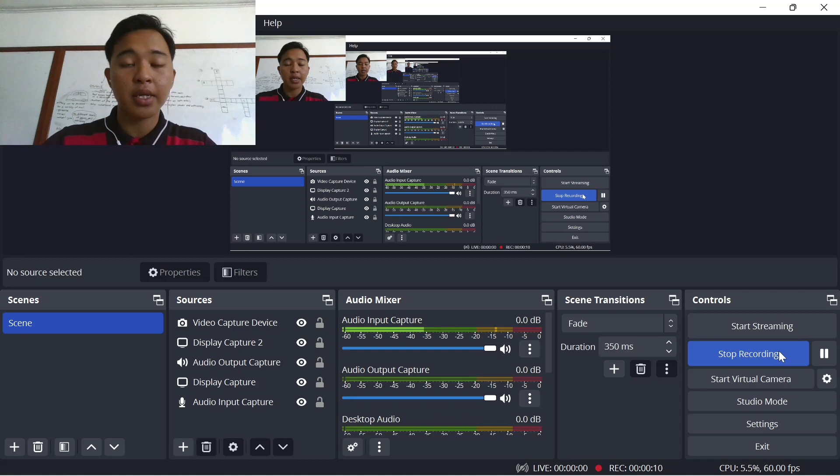In this video, I want to explain how I do my SolidWorks project and the process. Okay, before I start and proceed to the project itself, I will turn off my camera first to avoid any interruption while I'm explaining.

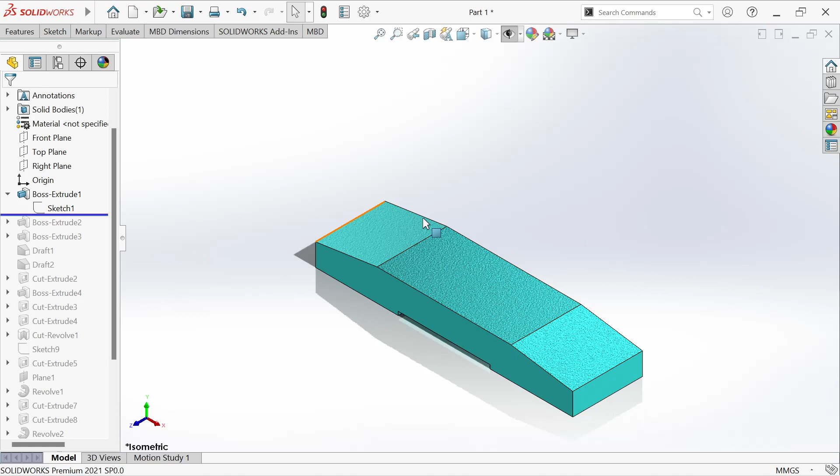Okay, as for the first part of my project, I do the pillow block first, or the housing of the bearing. Yeah, as you can see. Okay, as you can see, in the first part, I start off by doing the base of the pillow block.

If you can see from the sketching, the first thing I do is draw a center rectangle, and I put the length of it as 140, and I leave off the width and the height first. After that, I draw a line connecting from the right side and left side. I draw two lines connecting the right side to the top side of the rectangle. Same goes for the right side to the top of the rectangle.

After that, I put the dimension at the right side, which is 12 mm, both right and left side. And then I put the line length as 33.50 mm. And then I use the equal function for both lines here and here. And to make the foot of the base structure, I use a 2 mm gap and 44, 45 for each foot.

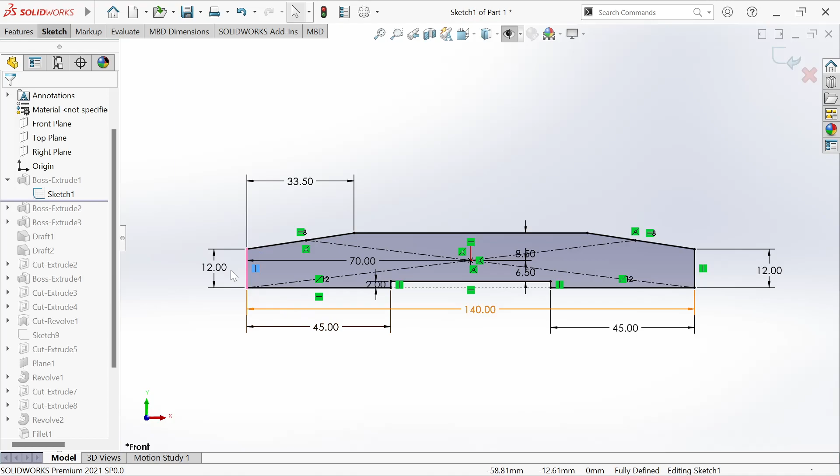To make the sketch fully defined, I make sure all of this is vertical and also coincident points. After that, I boss extrude the sketching. Here, as you can see, I boss extrude it from mid plane by 38 mm.

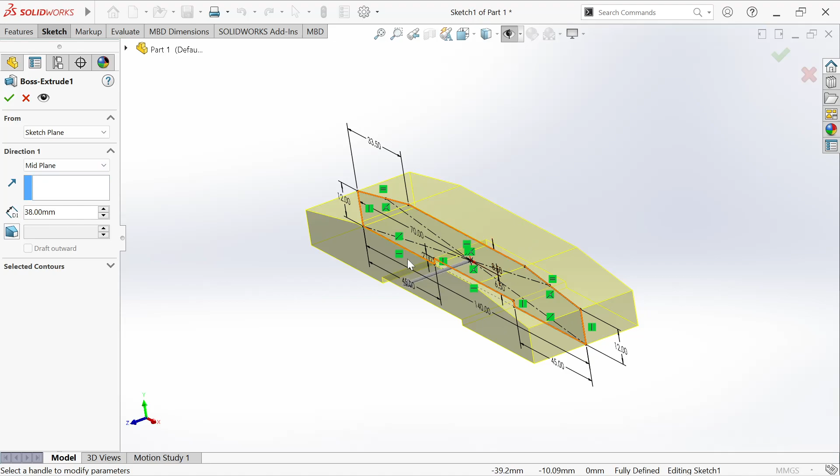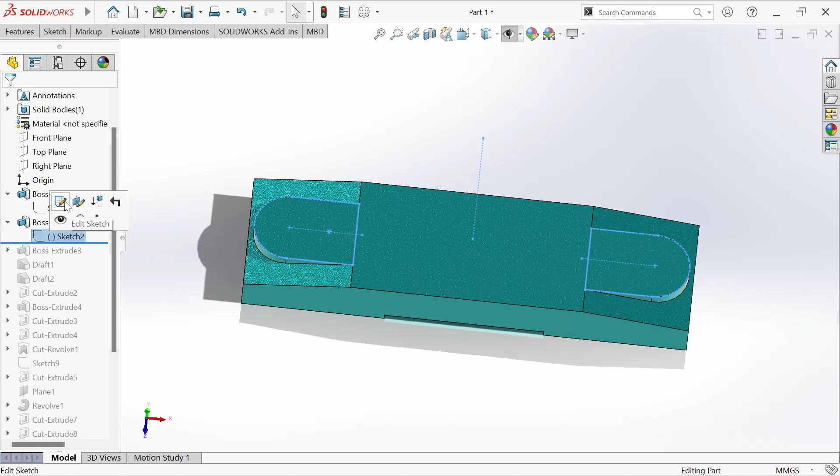So for the next part, I do the gap here where we will put the screw or the connector place. Here what I do is use a straight slot from here to here. Then I put the dimension 21 mm. The radius for the curve here is 11 mm. And for the width, I use 22 mm.

And as for the right part of this left slot, I use power trim and I trim the right side of the slot, the curve of the right side. And I make this coincident. The point of the slot is coincident. And then I draw a line here to make sure it is one available slot. After that, I draw a line here to make sure I can use this line to mirror the entity.

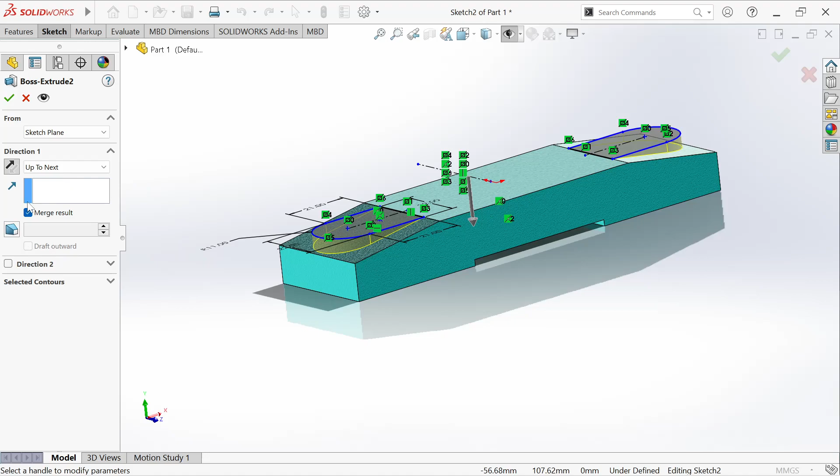After I mirror, I extrude the sketching using up to next. Yeah. With no specific dimension, I only use up to next and it will come up like this, the same as the upper side of the base.

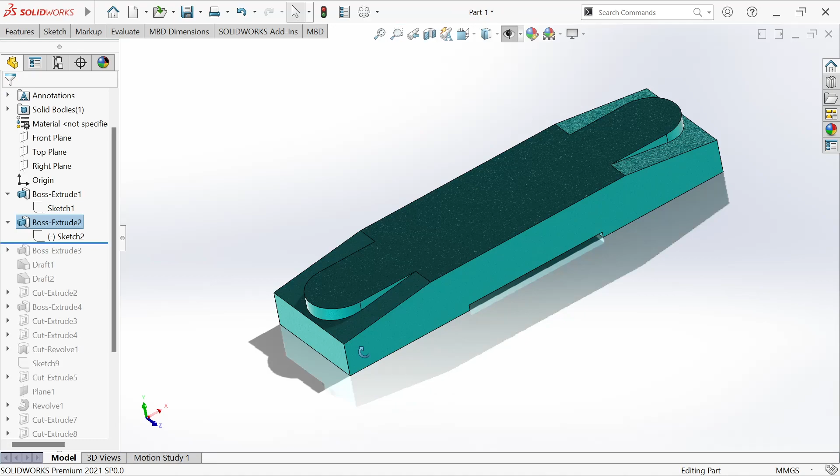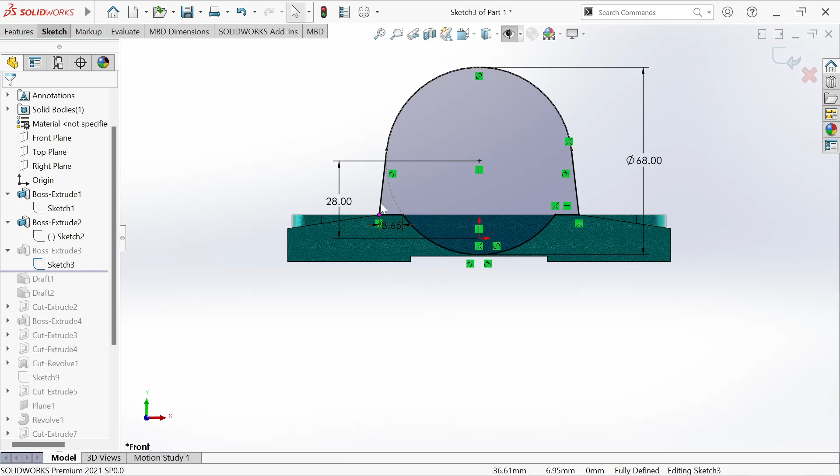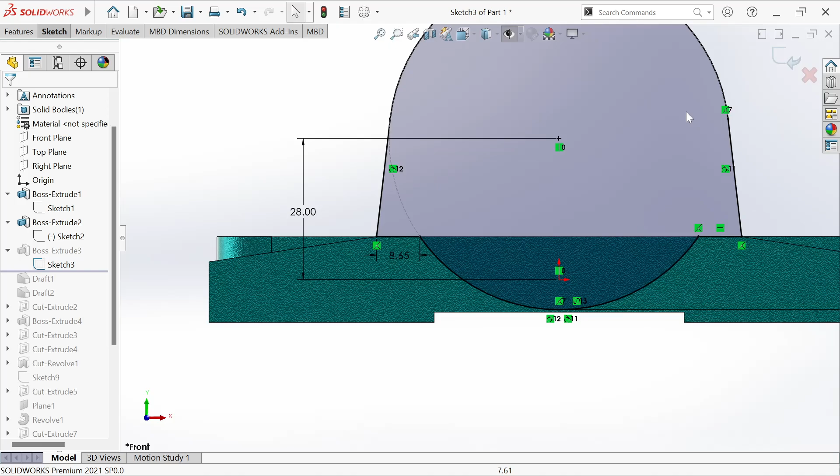After that I draw a line from the circle to the end part before the slide here, and I use power trim to trim the remaining circle inside to make this structure match this shape. And to make sure it's fully defined, I make sure this is tangent and coincident. The point here is coincident and there is a tangent line. After that, I put the dimension here 8.65.

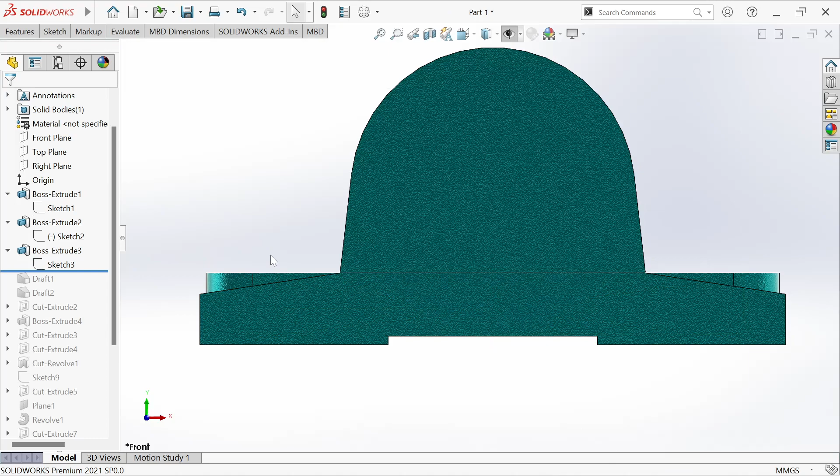After that, I boss extrude the sketching from mid plane by 33.0 mm.

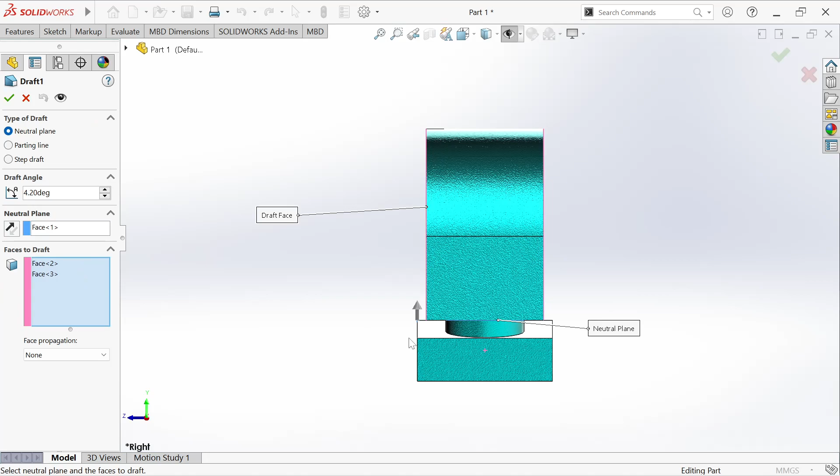Moving on to the next part, what I do here is I draft the housing part for the bearing. You see here, I draft by 4.20 degrees, using this as a neutral plane, and this is the draft face.

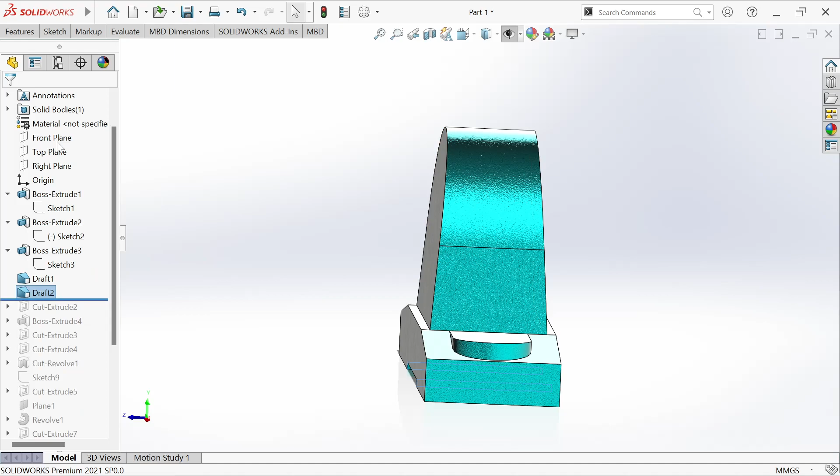After that, I do another draft, which is for the bottom part of the base here. For the neutral plane, I use the upper part of the base, which has a slot, and then for the faces to draft, I draft this and this.

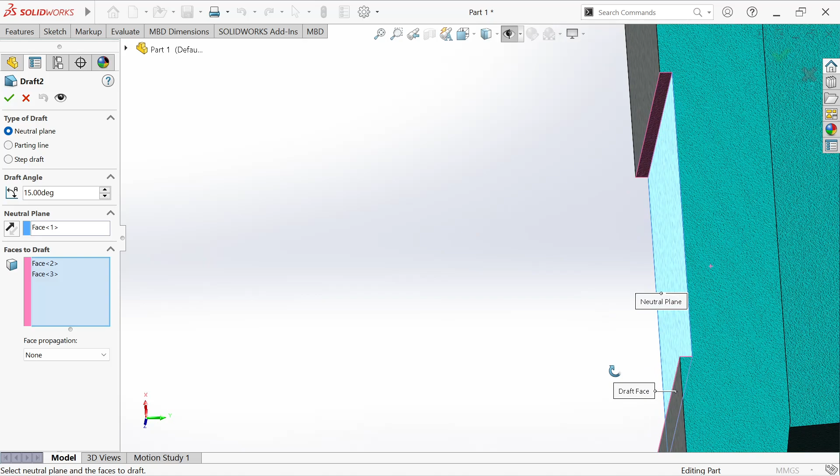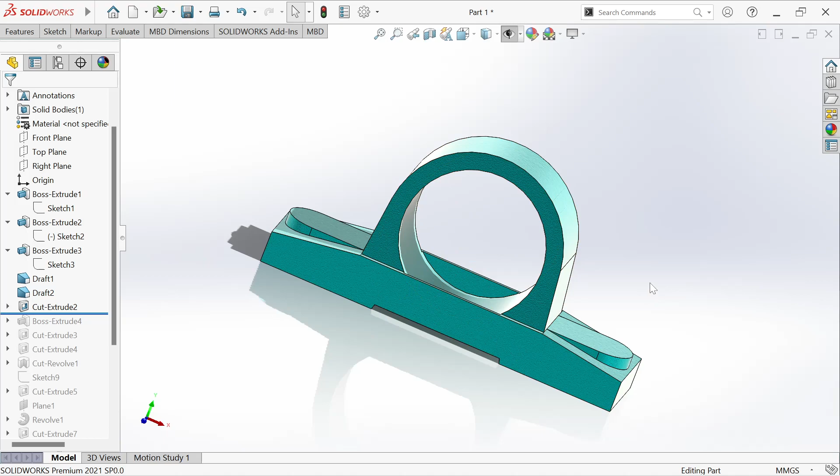After the draft, all I do here is cut extrude the middle part of the circle to make sure we have a place to put the bearing in. The extrude size, the circle size, is 55. The diameter of the circle is 55. I do the sketching here and then cut extrude the circle.

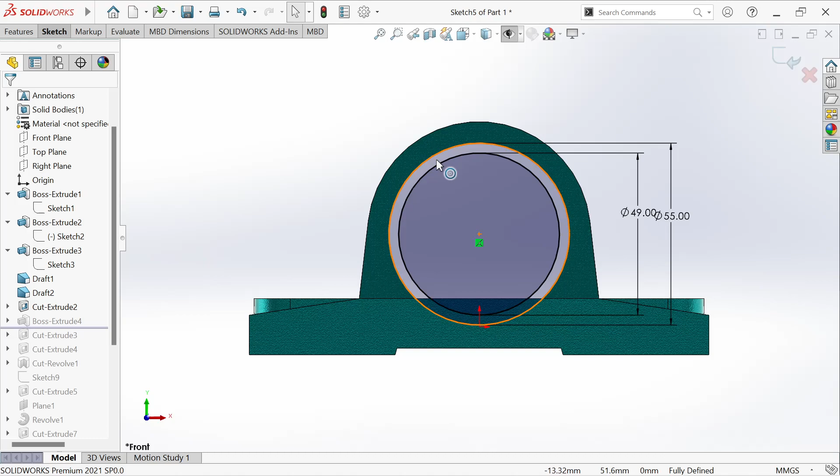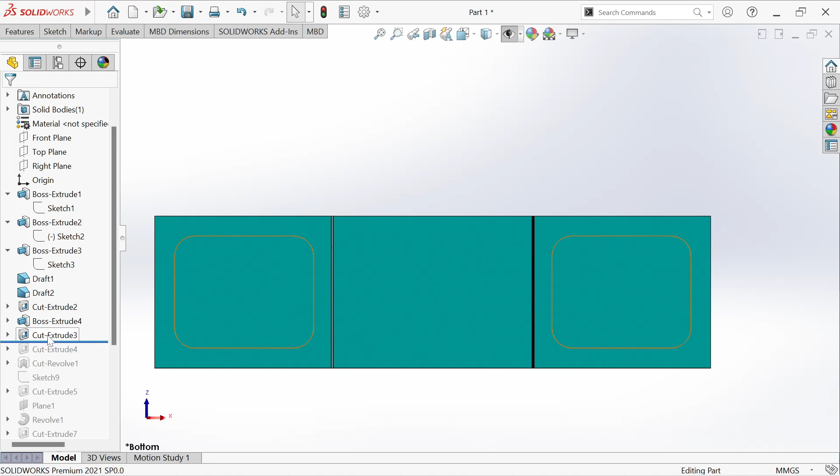As for this part, I cut extrude the bottom part of the base, or the right and left foot of the base. I cut extrude it by 7 mm.

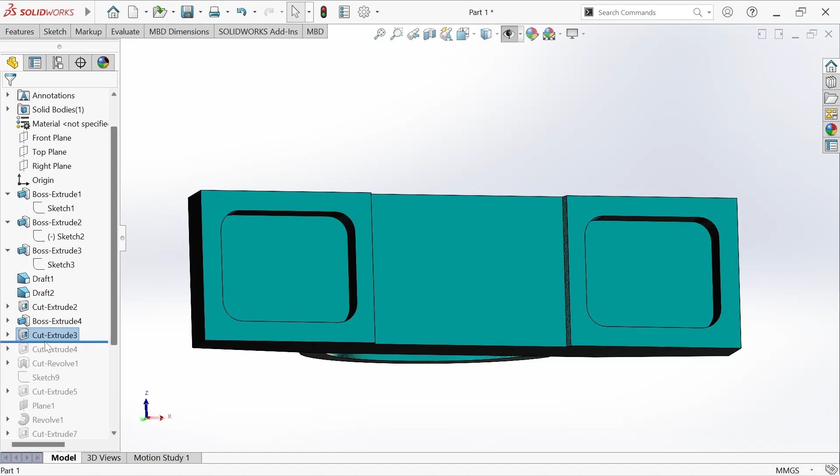As for this part, I cut extrude the bottom part to make this curve, both of this curve at the base of the pillow block.

What I do here is draw an arc and then draw a line. This arc has a radius of 100 mm from this point to this point, done by a 3-point circle, 3-point arc. And I draw a line here and mirror the entities using this line.

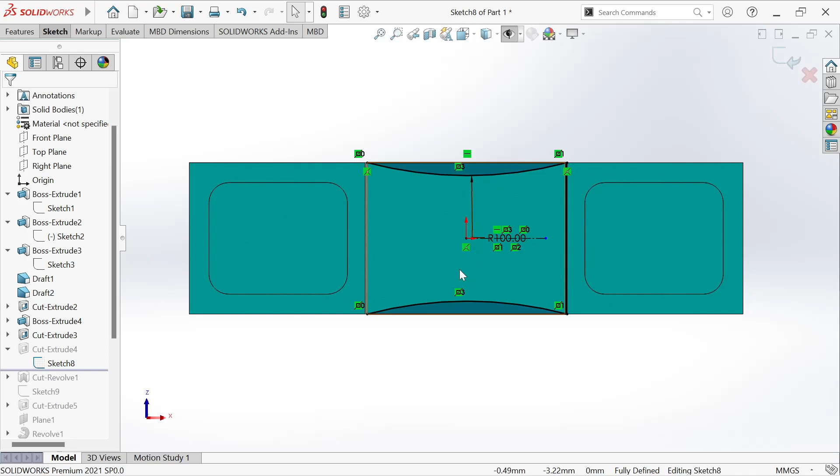I mirror these entities using this line, and then I cut extrude both of the sketching here, through all.

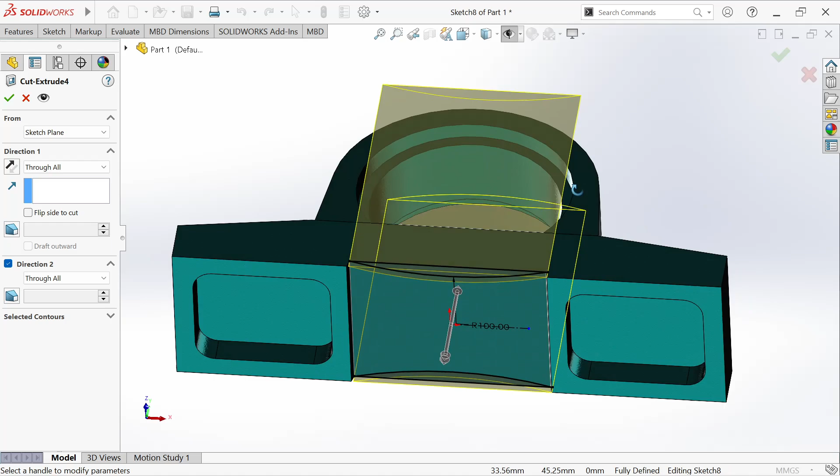Here, as you can see, we cut this front and the back part of the base. I will not cut any of the base of the bearing because of the draft we did just now.

As for this revolve cut, the first thing I do is use the same midpoint of the circle we used for the extrude here and for the cut here, and I put the circle diameter at 52.20.

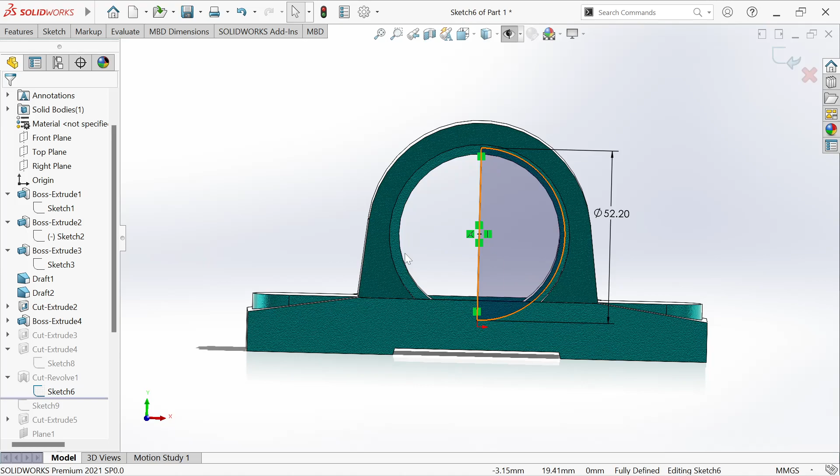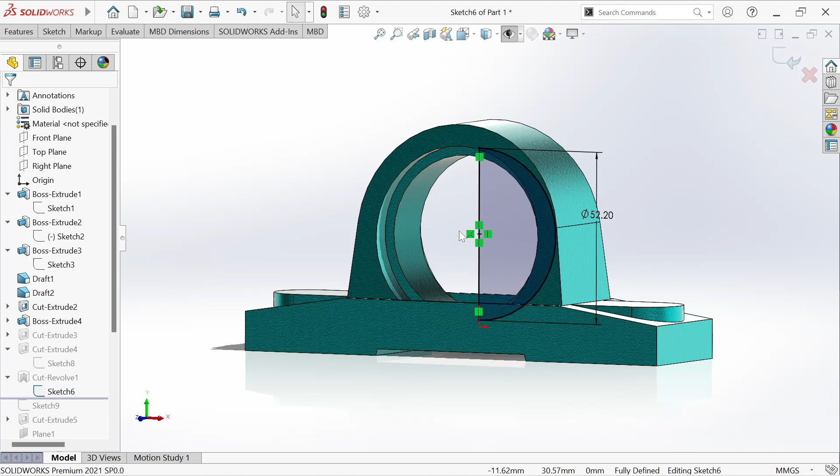By doing this, I draw a line from the center up to down here, and then I use the power trim, trimming the right part. Using the sketching, I cut revolve this inner part of the bearing place where the bearing will be put, to make sure there is a slightly curved shape here, since the bearing will also have a curve shape.

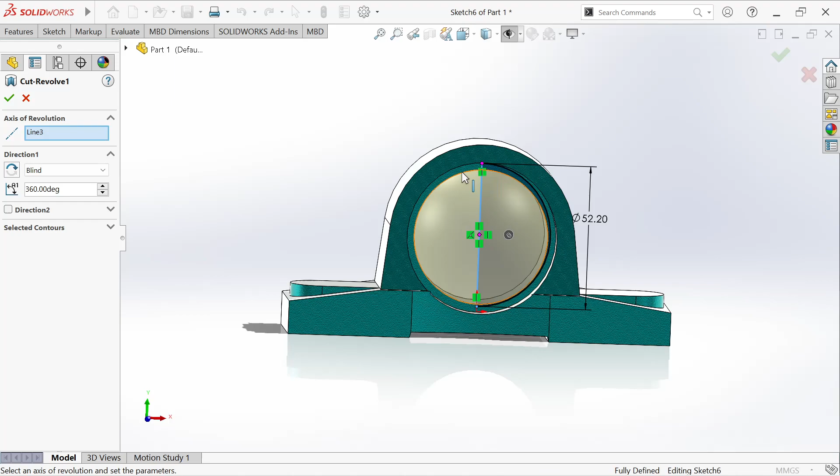As you can see there, the cut will not cut the upper part of the extrude, but it will cut slightly inside the housing itself.

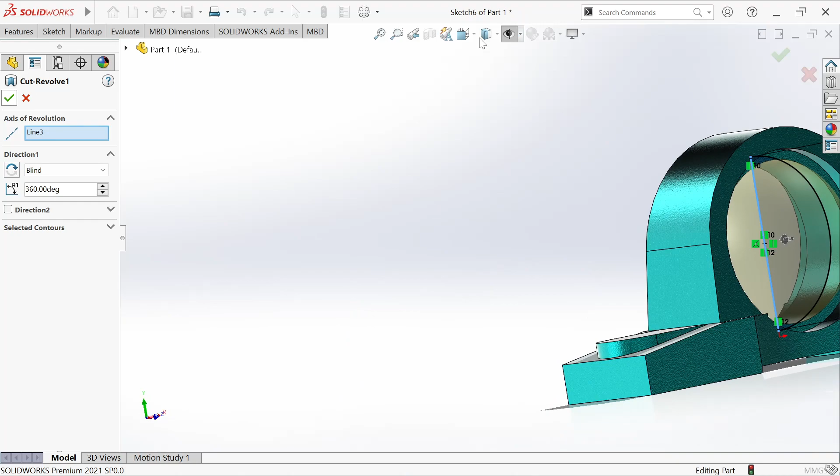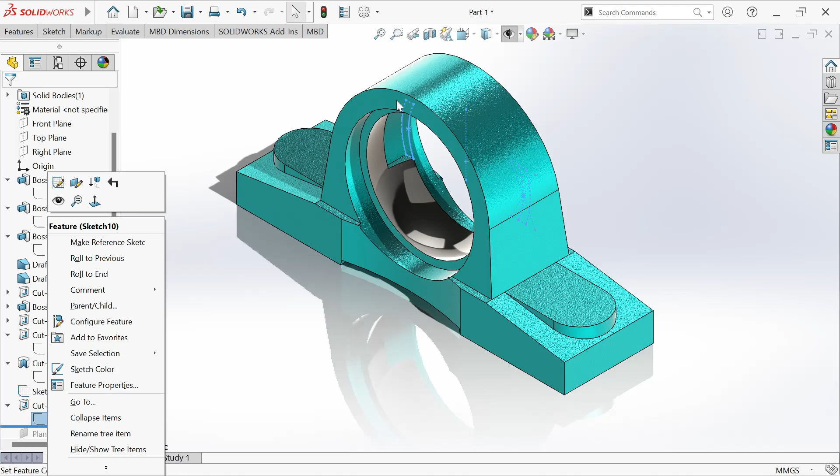Moving on to this part, what I did is use extrude cut to cut a part of the inside, a slightly part of the inside of the housing. I do the center rectangle from the midpoint of the circle here.

What I did is use power trim to trim the remaining of the line and leave only this upper and lower line. Then I use the 3-point arc. No, I didn't draw a line here.

What I do is convert both of these lines to entities first. After I draw this, I use power trim and trim the remaining part to make sure this remains as one entity.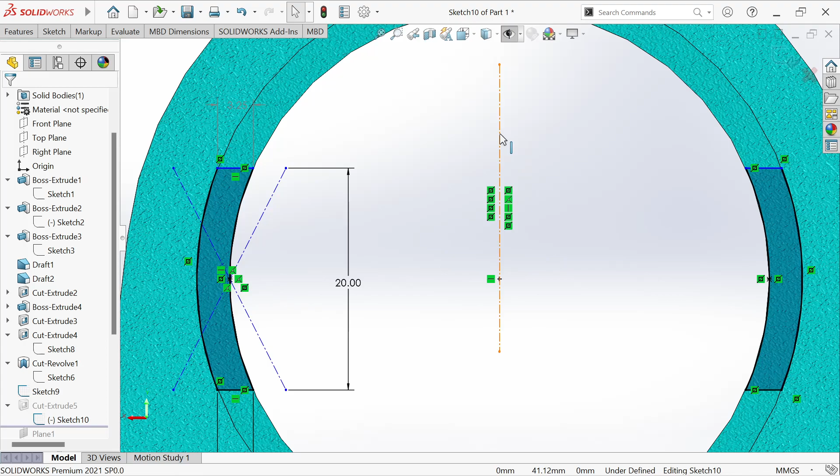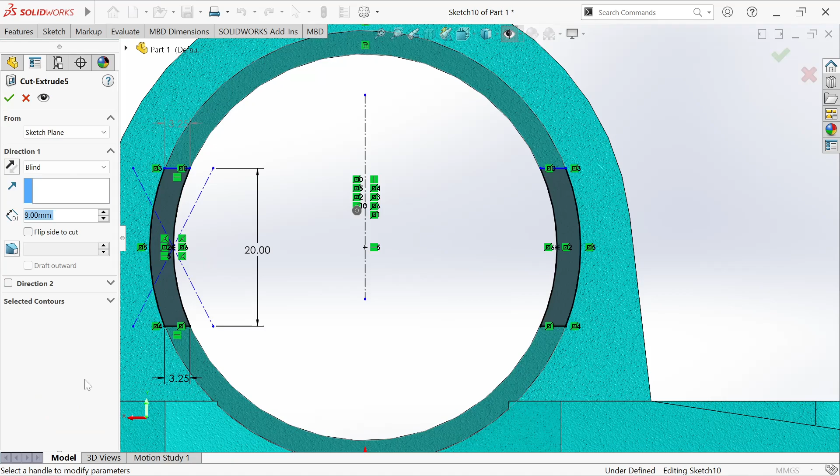Then I draw a symmetrical line to the midpoint of the circle, and I use this line to mirror these entities to the right part here. Then what I did is cut extrude the sketching by 9 mm.

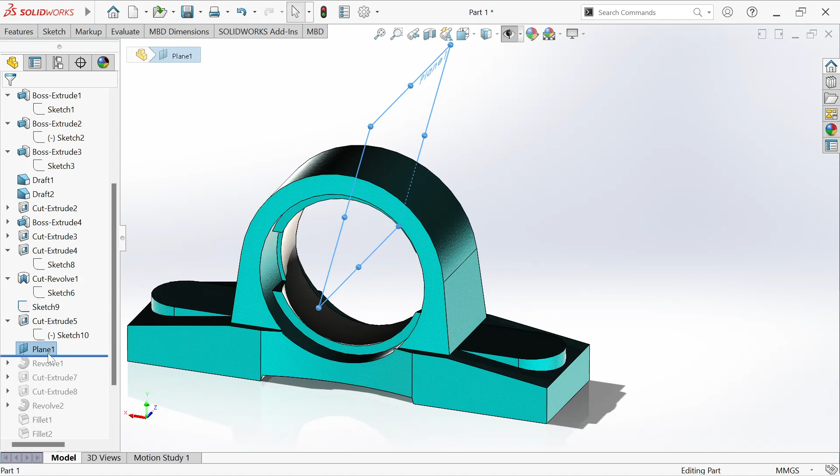After that, I set a plane here, as you can see. I set this plane in order to do the lubricant hole, or the place where we want to lubricate the bearing.

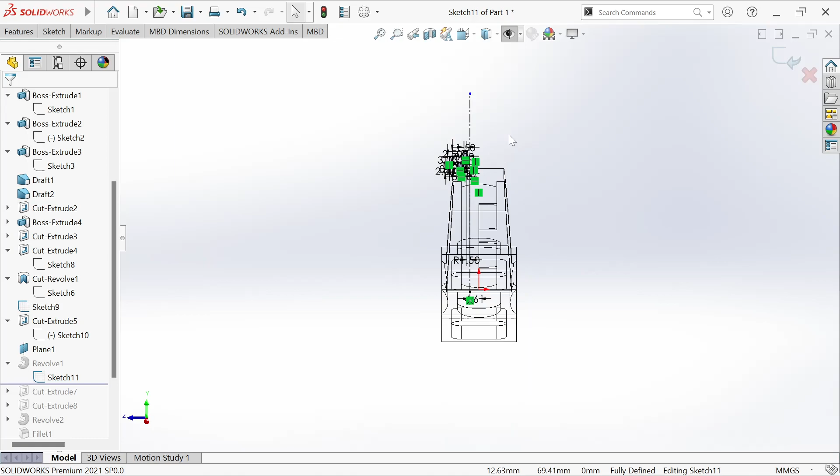As you can see, the sketching here is a bit complicated. What I did here is draw a line. I draw this 1, 2, 3, 4, 5, 6, 7, 8, 9 — I draw these 9 lines, starting off with this straight line.

Go to the left side, then up, right, up, right, and then from here to here I just draw a line, bend towards the left and then bend to the right, then again horizontally right to connect this whole line. After that I put the dimensions to make it look like this shape right here.

As for this line, I use this line to revolve the sketching to make sure I got this shape after I revolve the sketching.

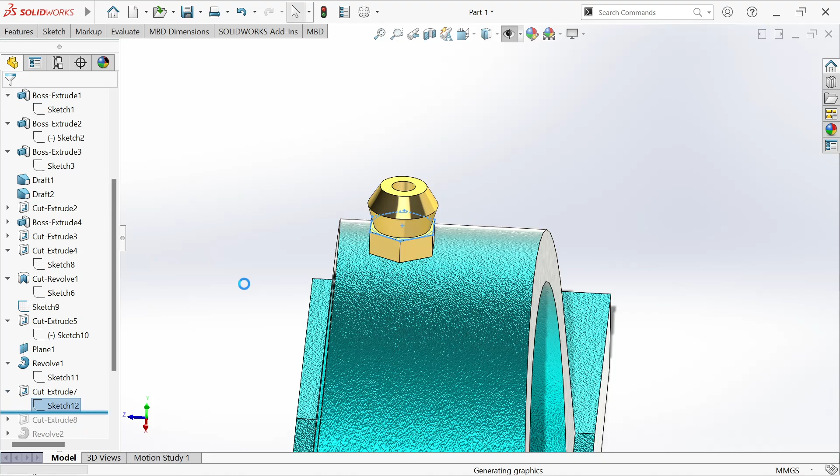Here I cut extrude. I use cut extrude to make the lower part of the lubrication hole to make it look like a nut shape.

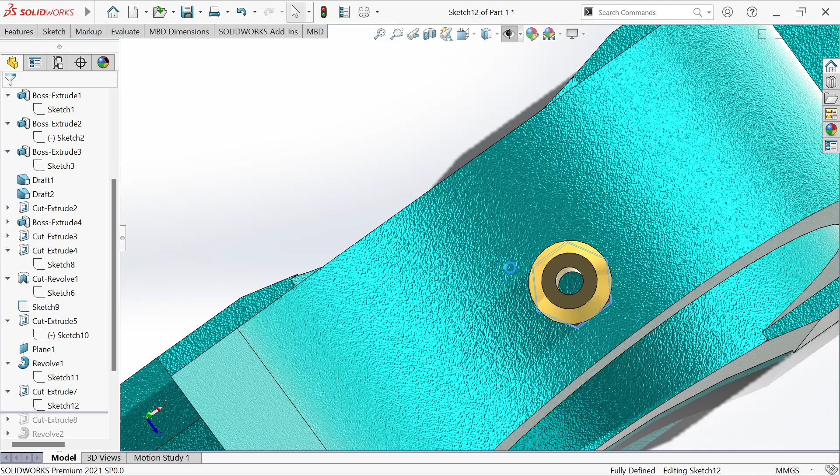As you can see, I only cut it by 3 mm, just for this part.

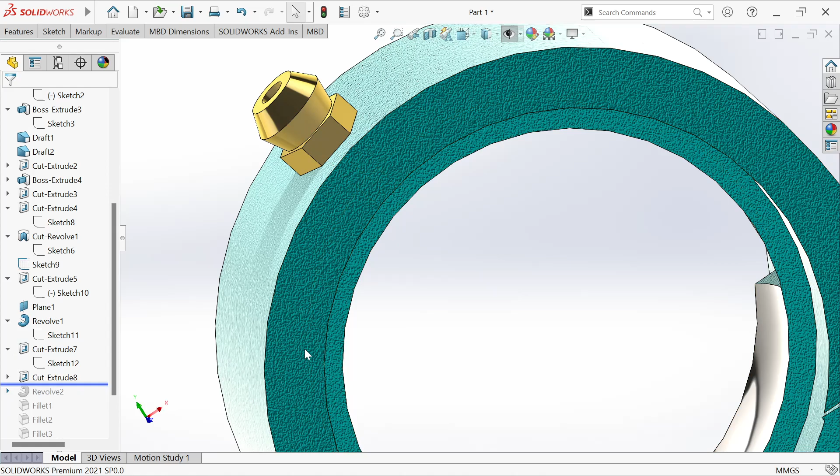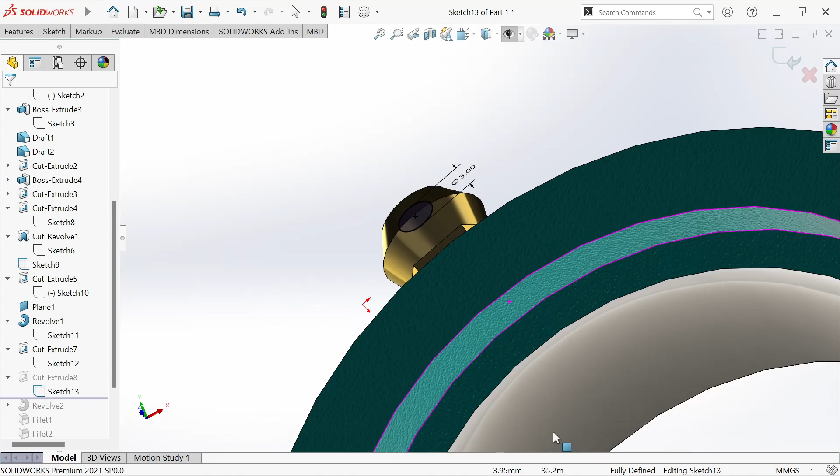Moving on to the next step, I cut extrude this part right here by 3 mm. I draw a circle by 3 mm here, and then I use cut extrude to cut through this part of the upper side of the pillow block. This is just for the lubrication part.

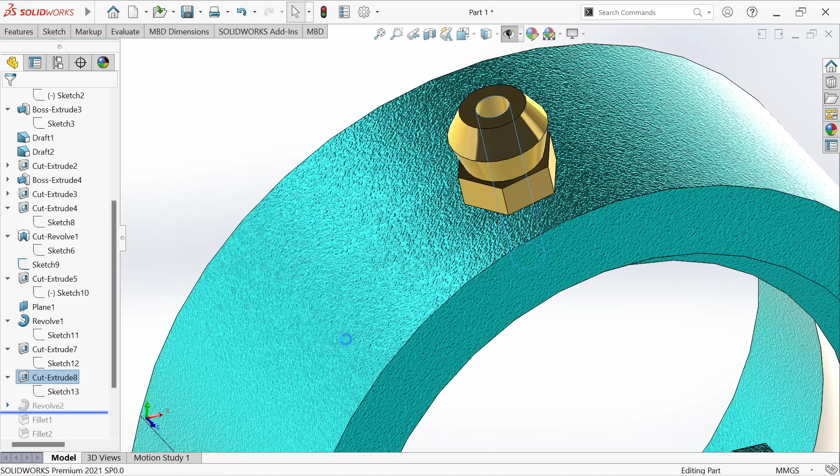As for the next part, which is the revolve placement, what I did is the lubrication hole cap here, which is just one ball.

All I did is the sketching. For the sketching, all I do is draw a circle inside the upper part of the lubrication hole or lubrication pot, and then same as the revolve cut inside the pillow block.

All I did is I trim the left side after I draw a center line. After I draw a line from here to here through the main point of the circle, I use revolve boss by 360 degrees to make it look like this.

There's a tiny hole inside here as a lubrication cap for the pot.

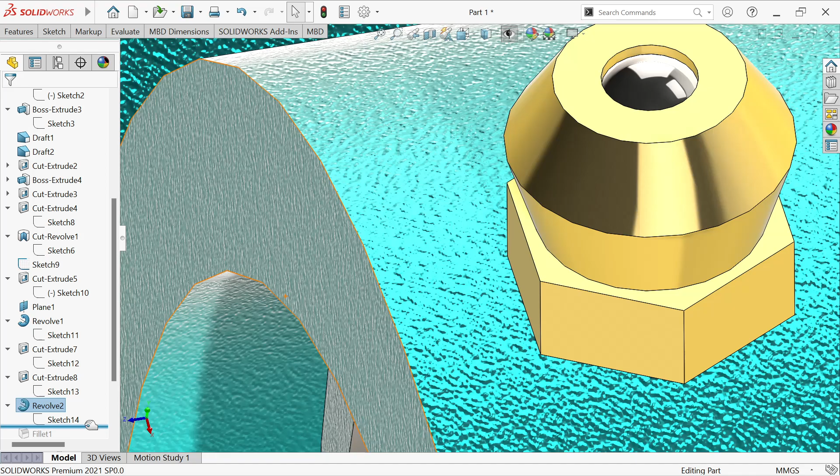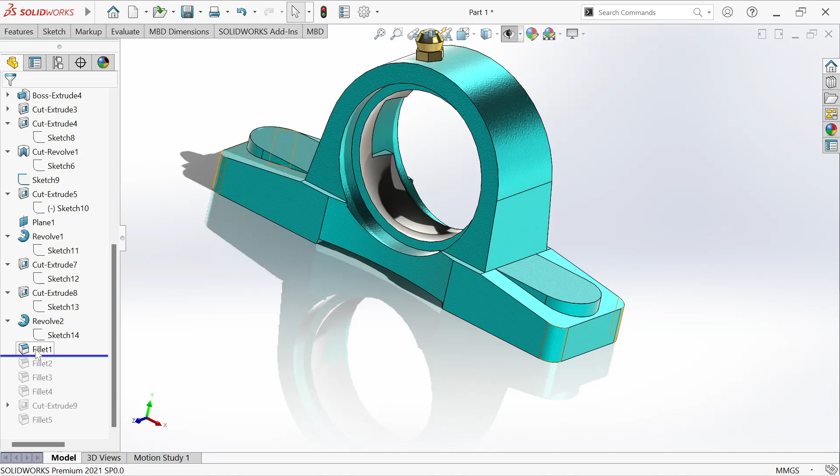Then moving on to here, what I do is I fillet this side. I'm starting off by filleting this side, the edge of the pillow block foot, and then I fillet the housing part of the pillow block, and then the upper part of the base of this pillow block, which is right here, and the screw part of the pillow block.

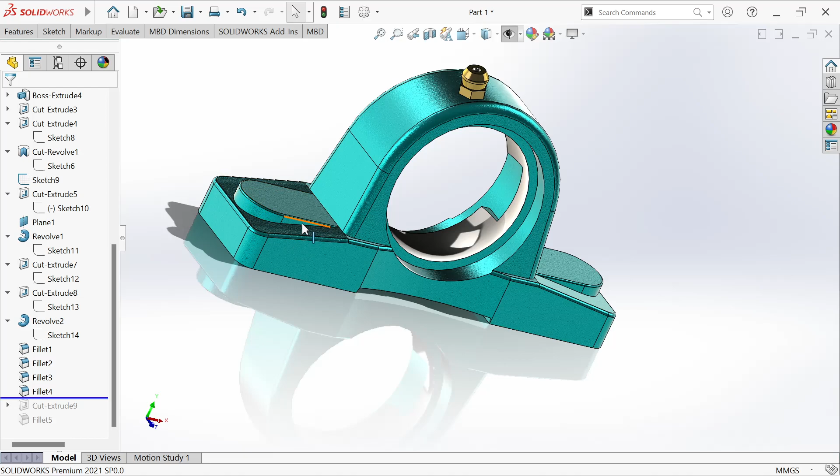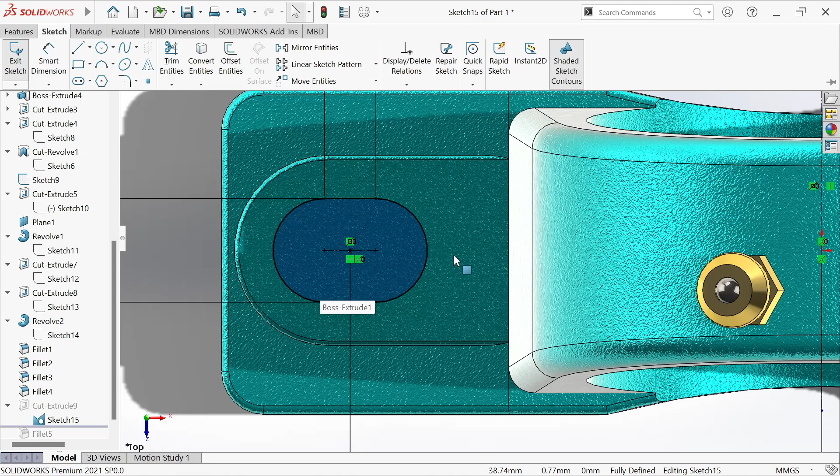After that, I use cut extrude. As you can see, I sketch a slot here. I use the straight slot here for the screw or for the connection part.

First, I draw from the midline to this left side part of the pillow block, and then I use the slot and put dimension 6 for the side of the slot, and then I use 12 for the width of the slot.

After that, I put the dimension 55 from the center of the slot to the center of this sketching, and then I draw a center line, and I use the center line to mirror this entity or the slot that I just did.

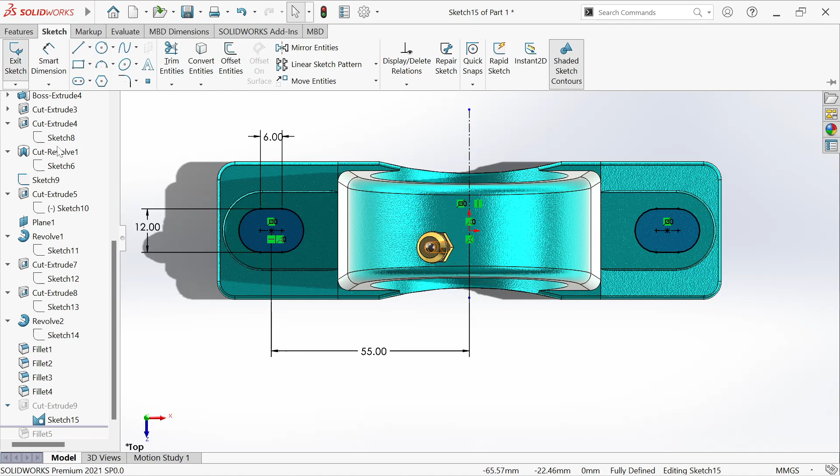After that, I use cut extrude and cut it through all. Yeah, I cut it through all. This is for the screw part.

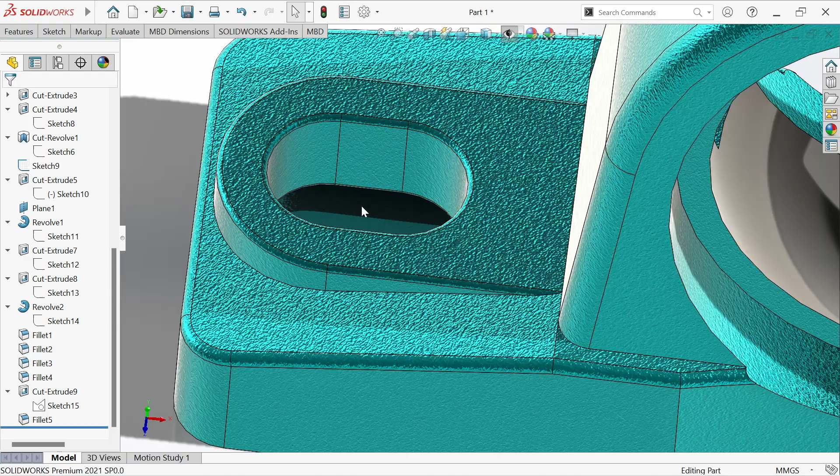After that, I use fillet to fillet the inner side of the screw part, both up and also the bottom. Same goes to the right side of it, at the top and at the bottom.

This is all for the first part.

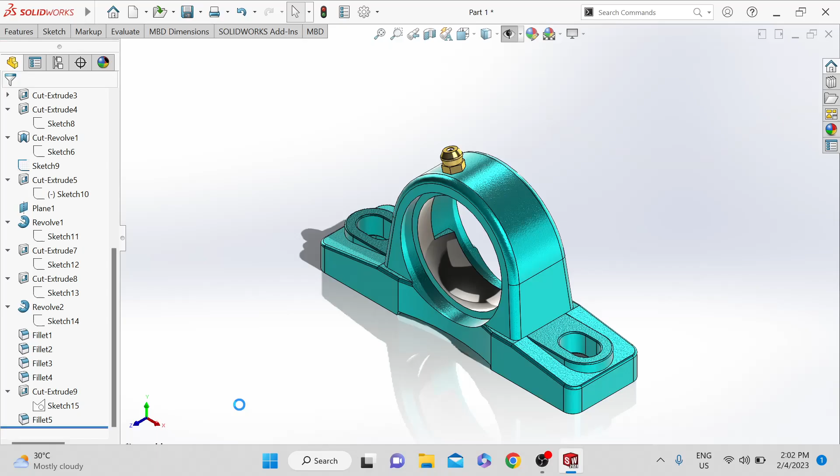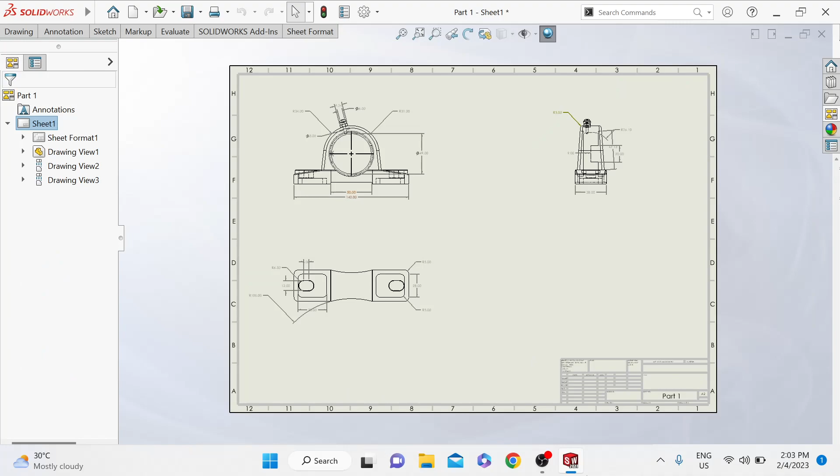Moving on to the next part, the second part, which is the ball bearing itself. As for this part, what I do first is revolve the place where the ball will be put in.

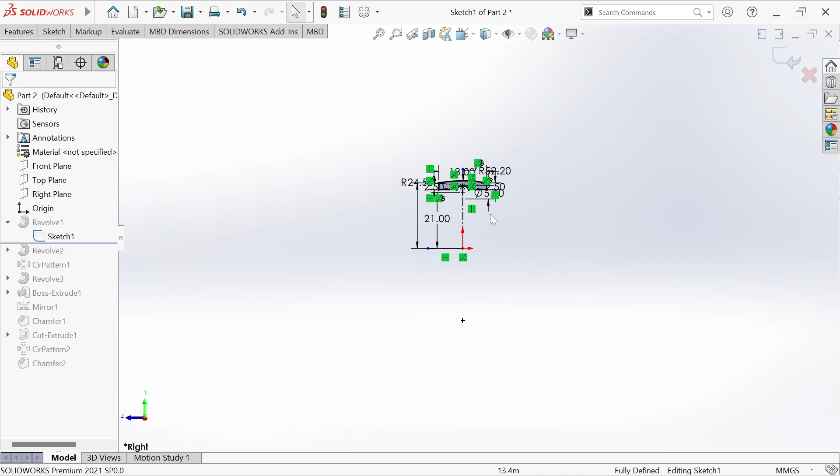I start off by drawing a center rectangle, and make the center rectangle length 18 mm and the width 2.5 mm. And then I draw a 3 point arc up here to here, and the arc radius is 24.5.

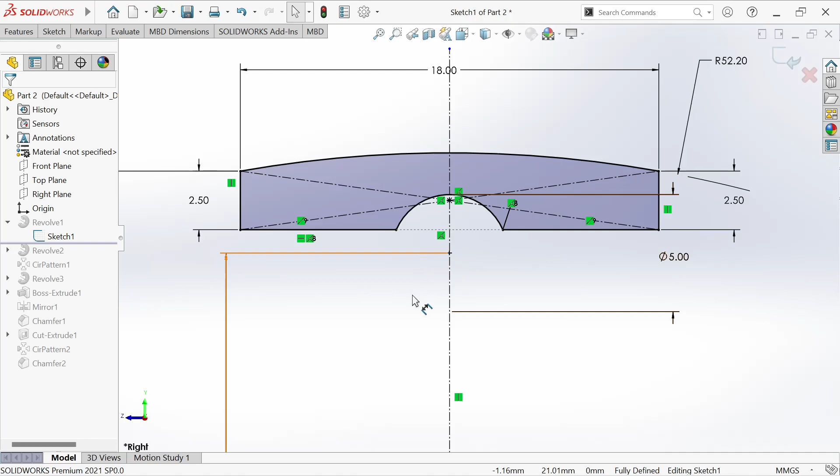After that, I use power trim to trim the side of the rectangle, and then I draw a circle here. The diameter of the circle is 5, and I use power trim to trim it. For the midpoint of the circle, the distance from the midpoint of the circle to the midpoint of the sketching is 21 mm. After that, I use revolve, and it turns out like this.

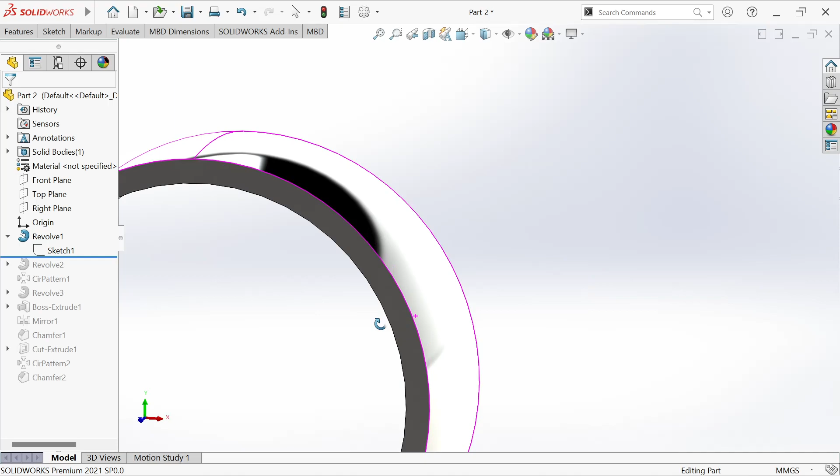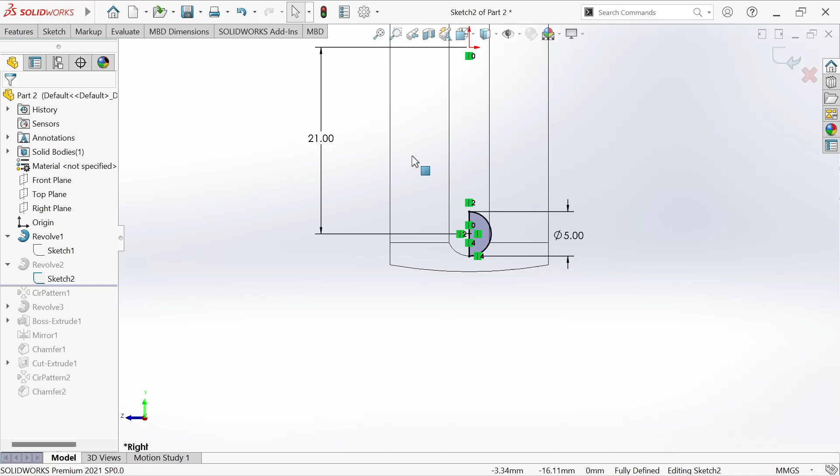For the second part, I do the ball here. I make the ball by sketching through the gap, inside the outer part of the bearing. I draw a circle, and the diameter of the circle is 5. I use power trim to trim the left side, and I draw a symmetrical straight line from up to here through the midpoint of the circle, and the midpoint of the circle to the midpoint of the sketching is 21 mm.

After that, I use this entity to revolve it to make a ball, to make a single ball here.

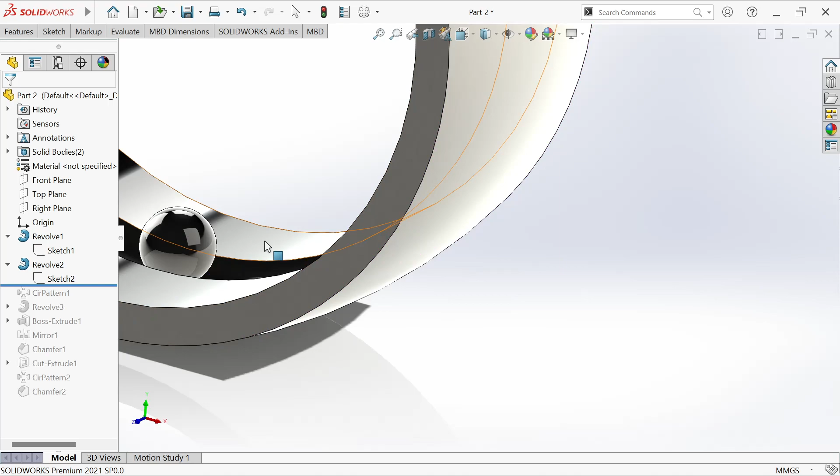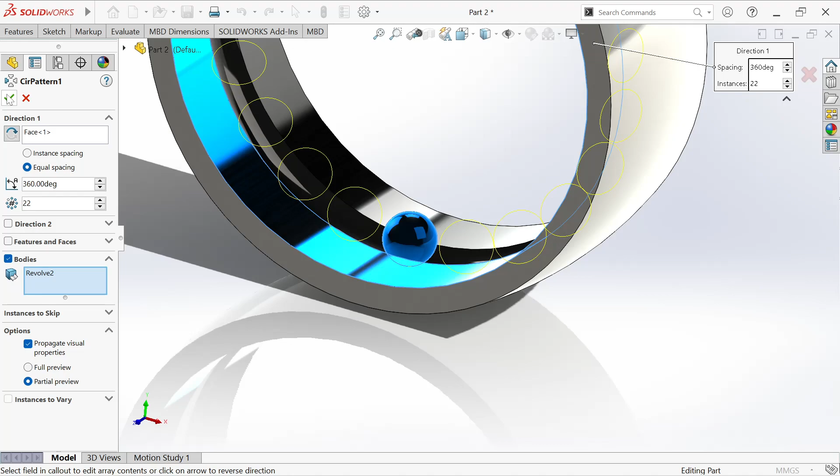After that, I use circular pattern. You can see here, I use circular pattern by using the inner face of the outer part of the bearing as the direction, 360 degrees, and the total number of balls is 22. There's a total of 22 balls inside this bearing.

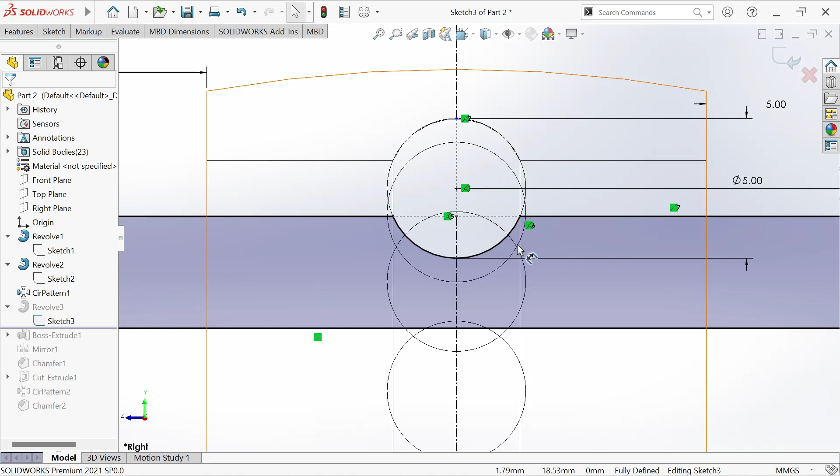After that, I make the inner part of the bearing. For this inner part, what I do is draw a rectangle shape from here to here, then draw a circle using the same dimension as the ball to make sure it fits perfectly with the ball. The length is 4 mm. The gap from the outer part drawn here is 15 mm, and the bottom part to the center of the sketching is 16 mm.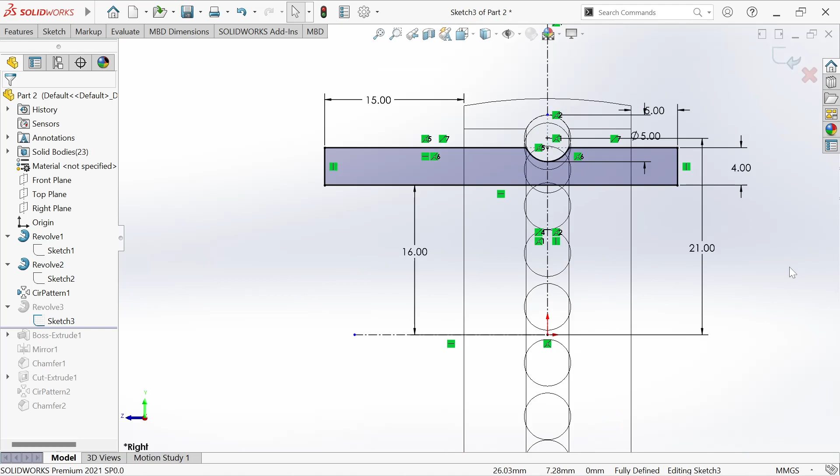After that, I use revolve by 360 degrees to make it look like this.

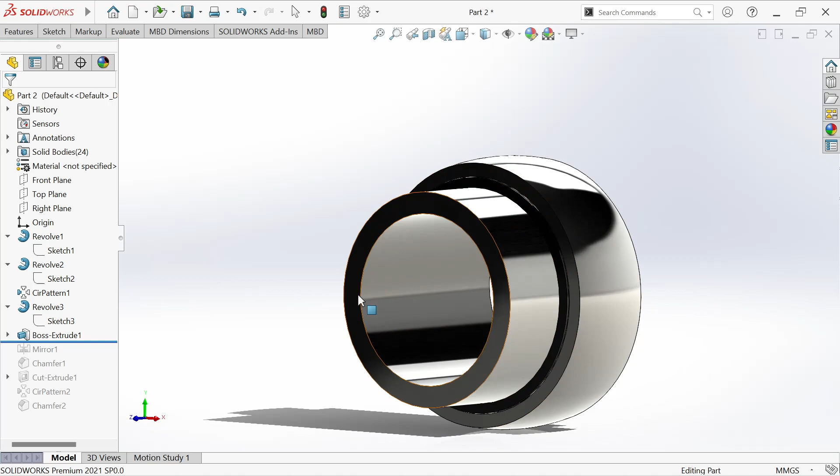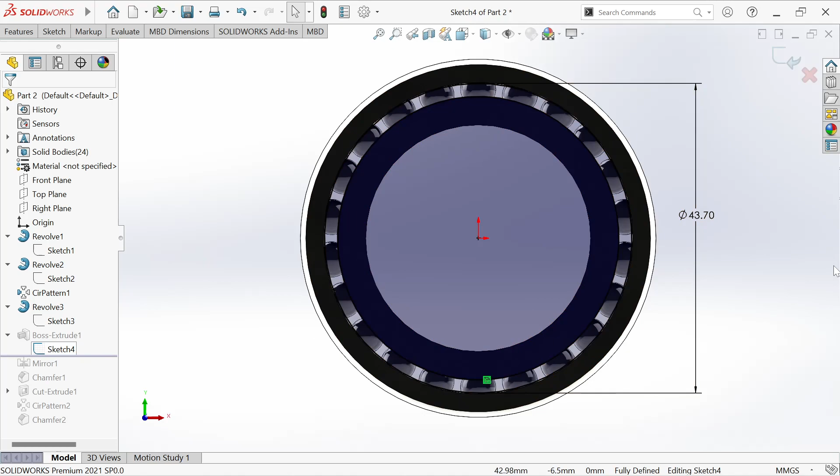Then I boss extrude the sketching here by 0.5 mm. This is for the front cover.

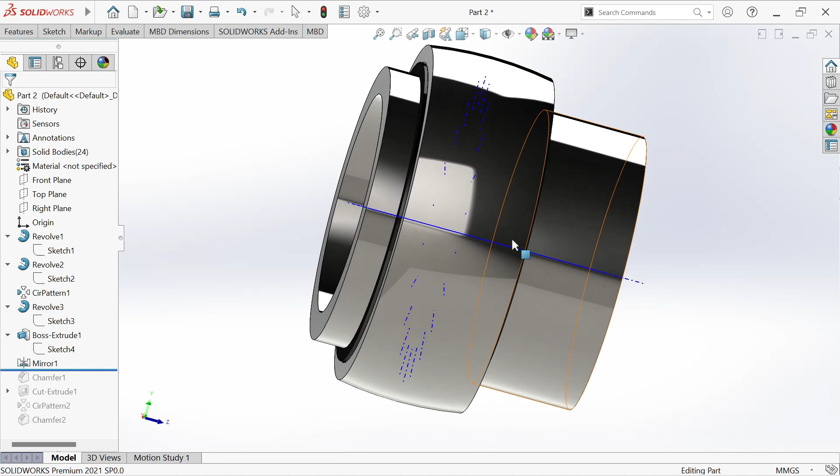As for the back cover, I mirror it. I use the center line — there should be a center line here — and I mirror it through here.

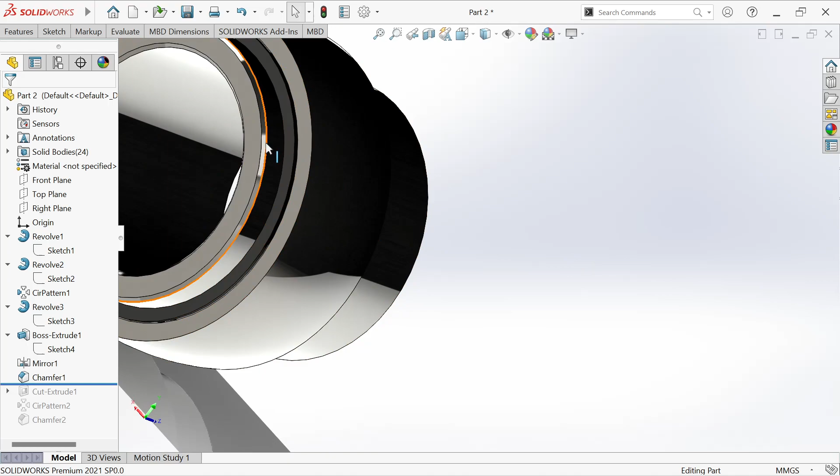As for the next part, I use the chamfer feature to chamfer the front side of this bearing and also here, and I also chamfer the inside of both sides of this bearing. After that, I make this hole right here for the bearing, which is the port to secure or put a screw or nut to connect it with the shaft.

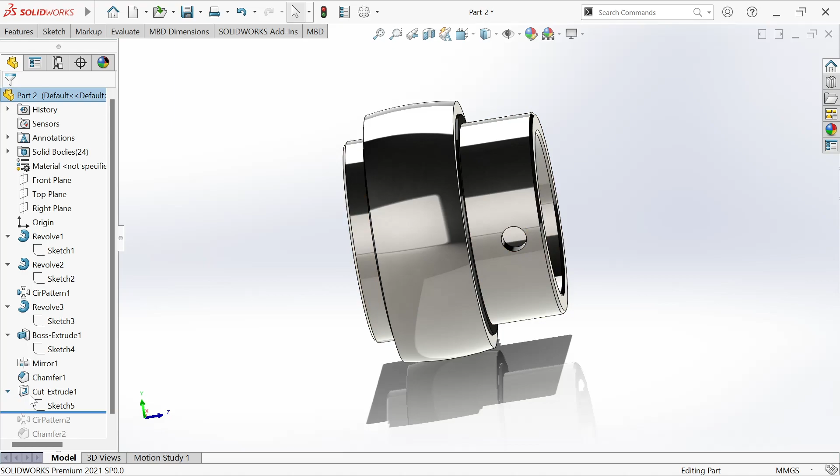I draw the circle with a 5 mm diameter, and the center of the circle to the center of the sketching is 18 mm.

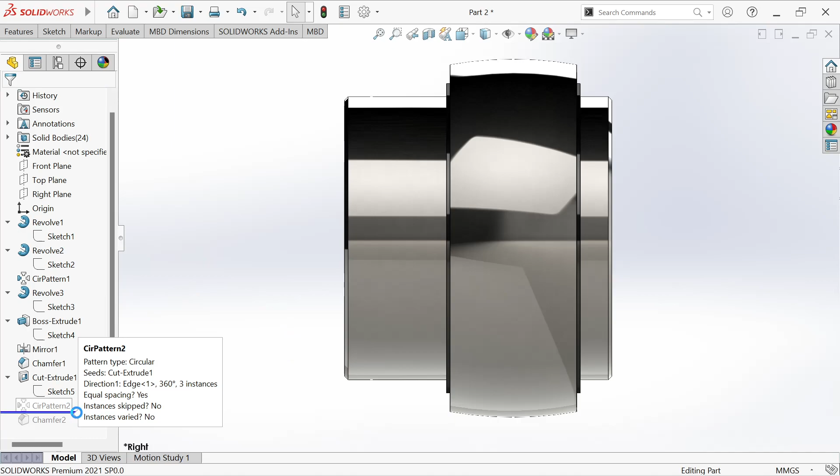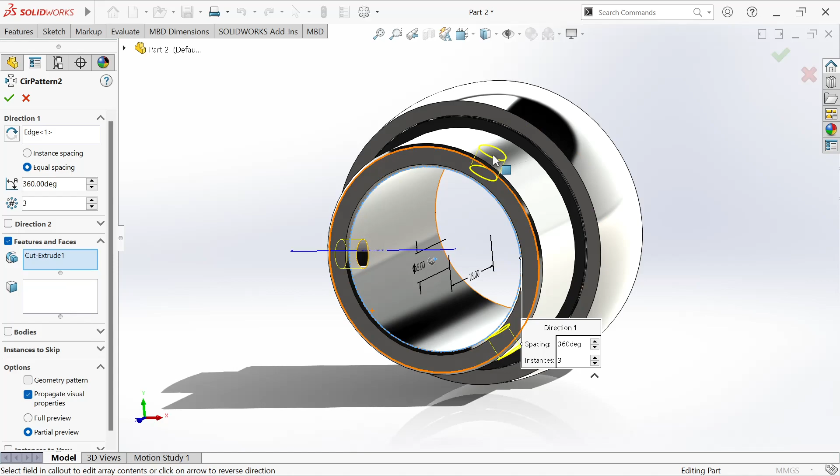After that, I do a circular pattern to make 3 holes. For the direction, I use this edge, and I set the total number of the circular pattern to 3 by 360 degrees, and it turns out like this. There will be 3 holes or ports for the screw to connect it with the shaft.

This is for the bearing, and I chamfer the hole from both inside and outside for all three holes of this bearing. This is the sketching for my ball bearing.

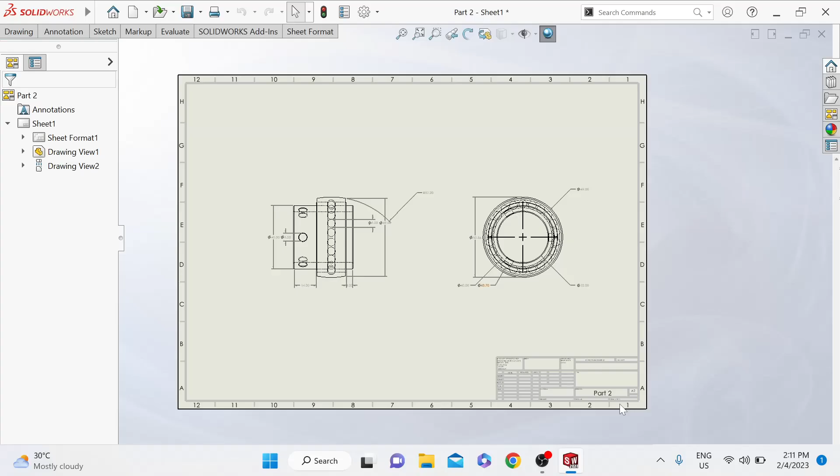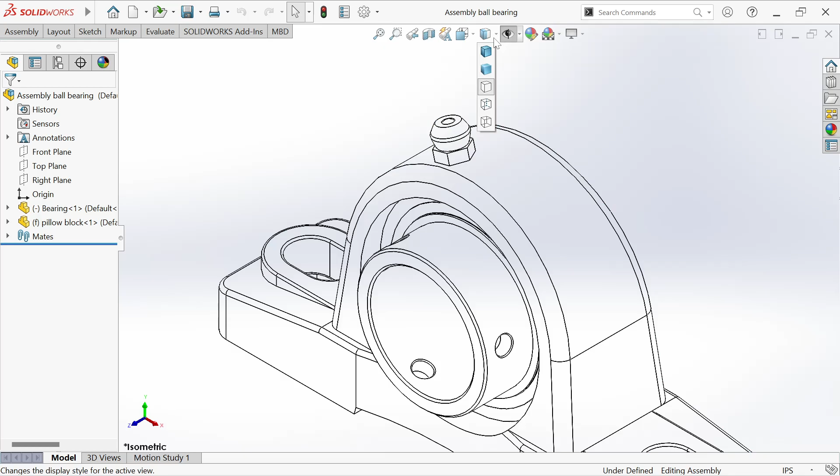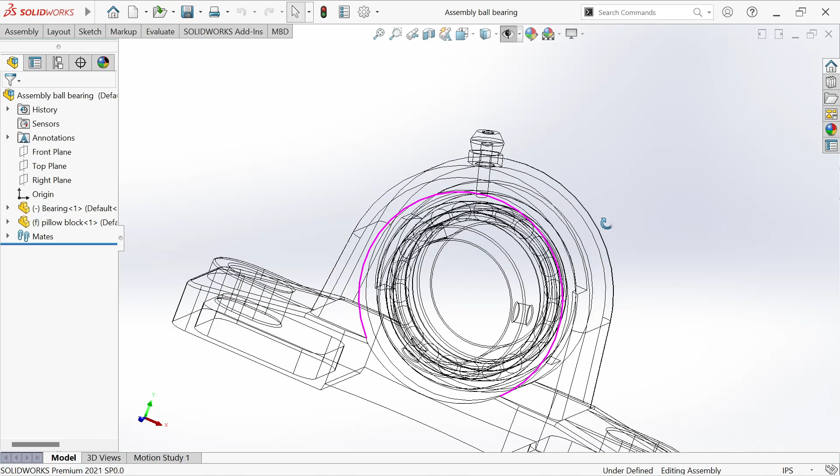Moving on to the assembly part. For the assembly, what I did is insert both components, part 1 and part 2, inside this ball bearing. I made the inside part of the outer, and the outer part of the ball bearing and the inside part of the pillow block. After I made it, I mated again this side to this side to make sure it's perfectly made.

And this is all for my SolidWorks project, which is a ball bearing. As you can see, the bearing is fully rotational. This is the lubrication part, the screw part, the ball bearing is inside. There is a cover, and the hole is for a screw or any connection to connect it with the shaft.